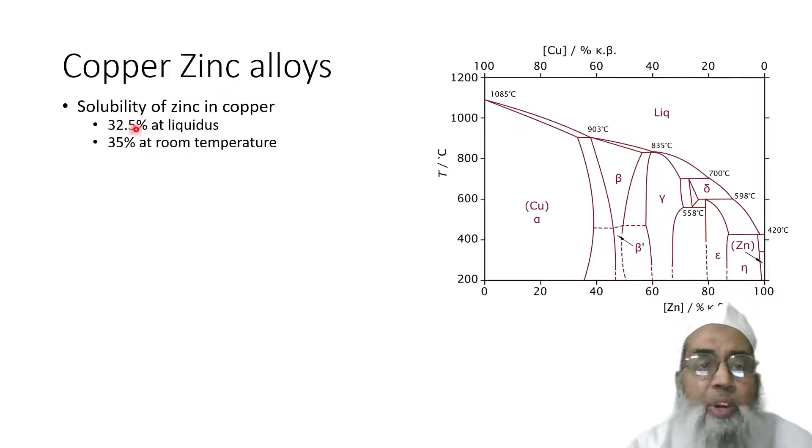Now, copper zinc alloy. If we look into this, this is the phase diagram. Initially, copper is having a small solubility, with 32.5% at liquidus and 35% at room temperature. The major phase is alpha phase, while having a substantial beta dash phase.

Now, alpha phase is relatively soft and ductile, having low strength, while beta phase is hard and brittle. Therefore, with the amount of alpha plus beta phase, the hardness will be given. The hardness and strength therefore increase with the presence of beta phase, but at the cost of ductility, of course. Therefore, we have to optimize for a particular application how much hardness we need and how much ductility will be reduced.

Now, similarly, in copper zinc alloy, the color depends upon the zinc content and changes to whiter yellow. Now there is flaring. When zinc is there, vaporization of zinc takes place. After vaporization, this zinc gives a very blaring white color, which we call flaring. With the increase of zinc content at a particular melting temperature, it increases.

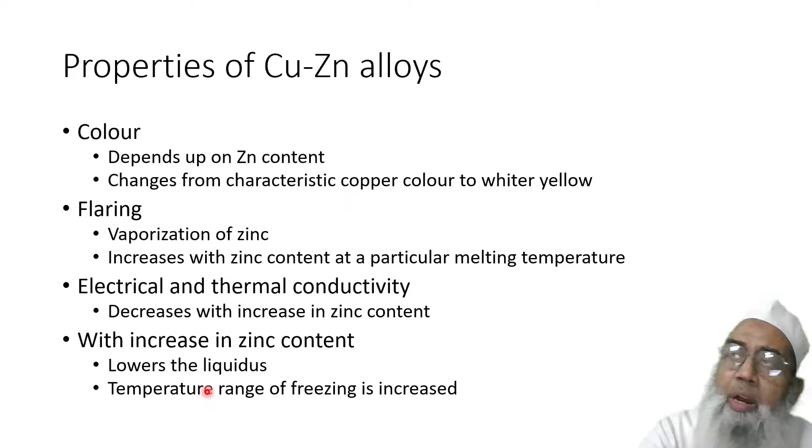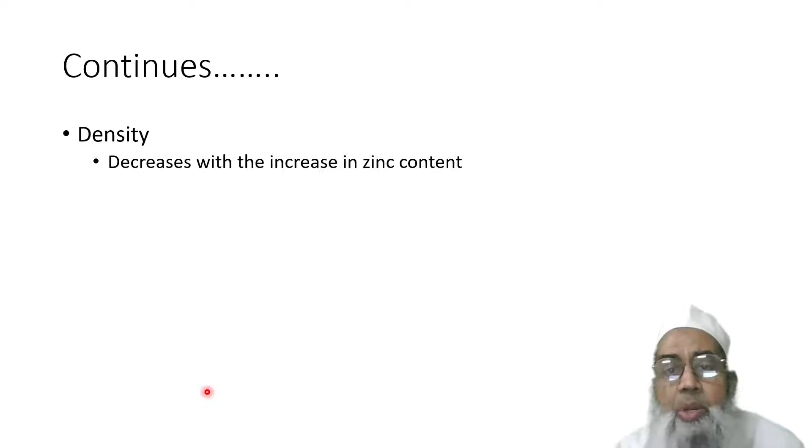Now thermal and electrical conductivity decrease with increase in zinc content. Therefore, depending upon the requirement, we have to take into account how much zinc is required. If we look into the phase diagram, zinc content lowers the liquidus, and the freezing temperature range increases with increase in zinc content, and therefore this will promote dendritic formation of the crystals. Moreover, the density of the alloy will decrease with the increase in zinc content.

This zinc gives dendritic solidification because the temperature range is wider, and therefore this promotes dendritic segregation. Therefore, non-uniform distribution of constituents is there, due to the dendritic freezing mechanism, and it also causes less corrosion resistance, and the properties of the copper get reduced with increase in amount of zinc.

Another important alloy is copper tin alloy, in which the solubility of tin in copper is in the form of alpha phase. It is up to 13.5% during solidification. At lower temperature, alpha plus delta eutectoid occurs. Here also, similar to zinc, there is a long solidification range, and hence coring and segregation of dendrites take place. This segregation causes embrittlement and also restricts the feeding mechanism, and this is all due to the delta phase.

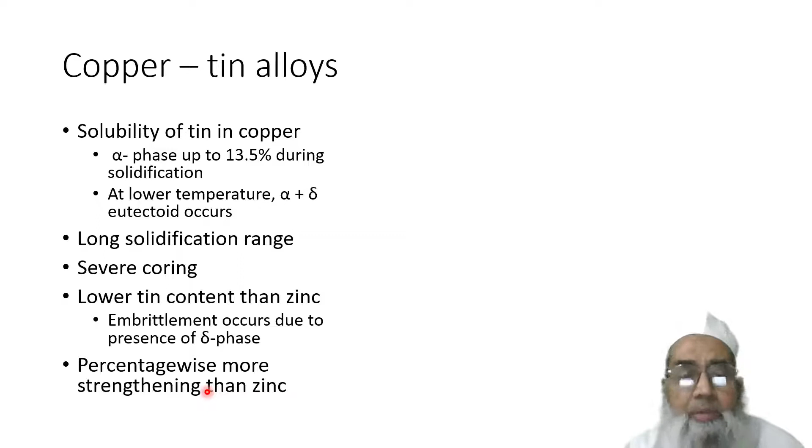Now, tin is more strengthening than zinc. Now, this gives the phase diagram. You see, this alpha phase is there, but this delta phase at room temperature causes embrittlement. Therefore, we have to make a compromise with the delta phase.

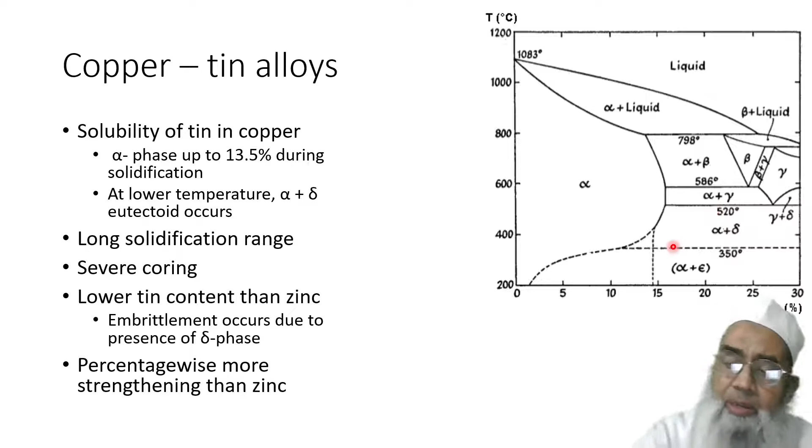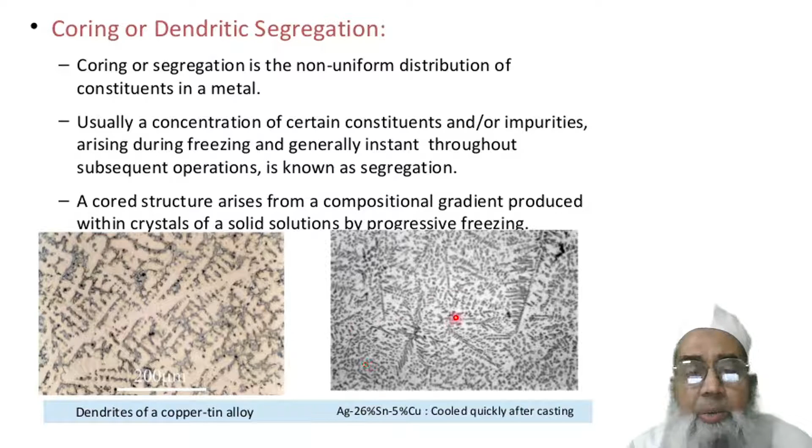Now, this is an example. You can see the corings have taken place with copper tin alloys, having 26% tin with silver. You can see the dendrites have been formed in casting products.

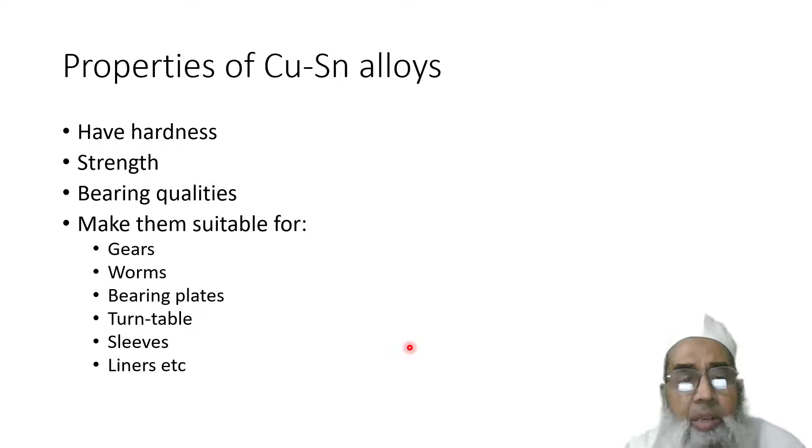Now, if we look into the properties, hardness increases with tin content, and strength as well as bearing quality increase, because the strength increases and therefore bearing capacity also increases. Hence it is used for fabrication of gears, worms, bearing plates, turntables, sleeves, liners, etc. Because of its resistance to corrosion, it is used in marine construction, naval vessels, bridges, dams, hydroelectric plants, and chemical processing industries.

An alloy of 88% copper, 10% tin and 2% zinc is known as G alloy or gunmetal. It possesses better all-round resistance, and therefore has extensive use.

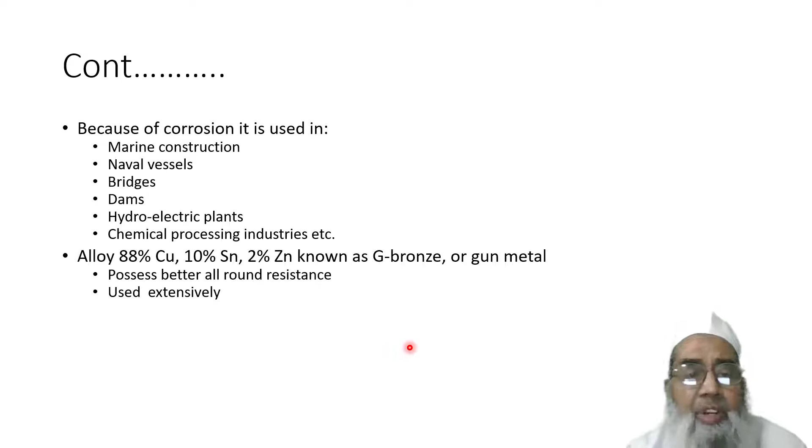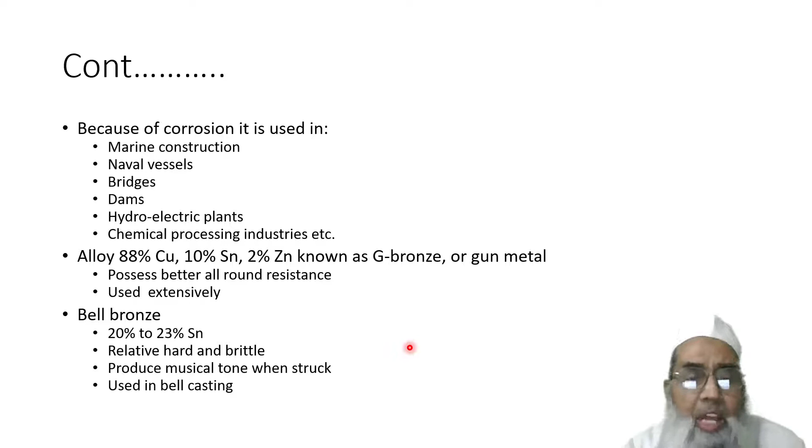Now, bell bronze is another alloy which is also being used, having 20 to 23% tin. It is relatively hard and brittle, but when it is struck, it gives a musical tone, and therefore it is used for casting bells.

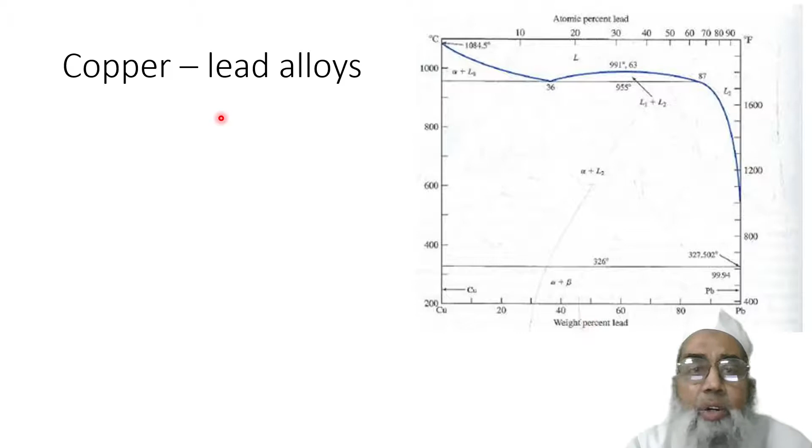Now, this gives a figure of the phase diagram of copper and lead alloy. Now, you see here the solubility of lead in copper is very little. It is about 0.002 to 0.005% at room temperature. But the bad thing is how it is present.

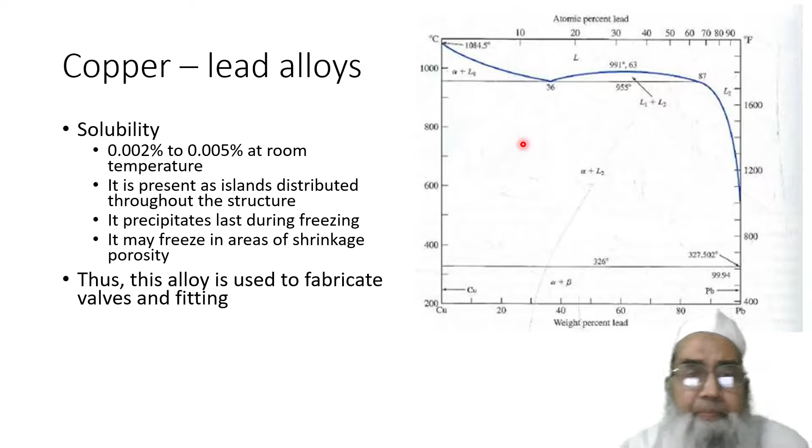It is not very much miscible. Rather, it is present as islands distributed throughout the structure. While freezing, they precipitate out as islands in the locations where the shrinkage porosity takes place. However, it restricts. But if the amount of lead is more, then this of course enhances machinability, but obstructs the appearance of it. Thus, the alloy is used to fabricate valves and fittings. Now, weak lead islands make machining soft, but it produces a discontinuous chip.

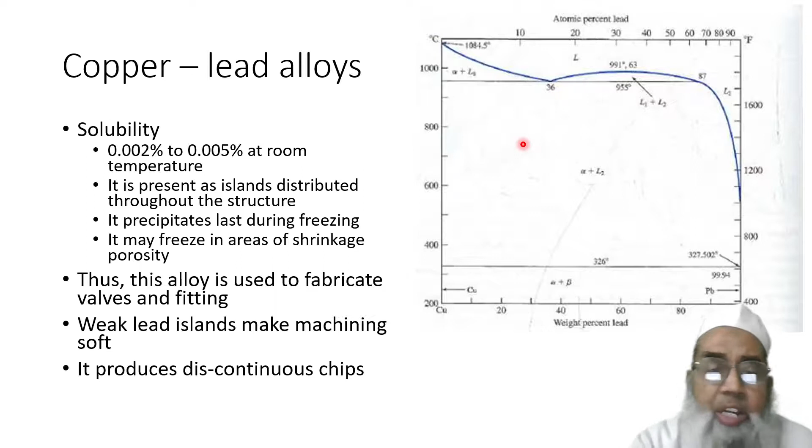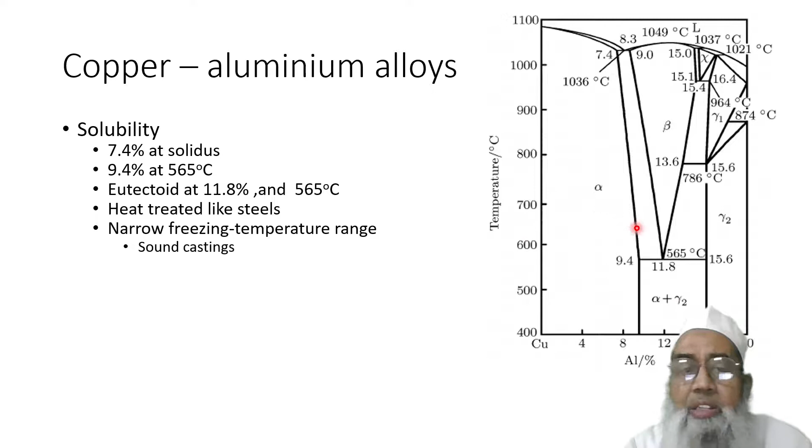Now, another is copper aluminium alloy. This is a very important alloy. Now, you can see the phase diagram over here. Initially the solubility is about 7.4% at solidus, while 9.4% at 565 degrees centigrade. But one thing is very important: if you look into this phase diagram, we can see that this is alpha phase, which is soft. But this is eutectoid.

11.8% aluminium gives a eutectoid, and therefore after that, if we cool down, it separates into two different phases. This gamma phase is hard. Alpha phase is soft, and therefore if we can capture this gamma phase by heat treatment, then of course hardening can be done, and therefore quenching for heat treatment.

Now if we can control the freezing temperature range, then we can have a sound casting. It is very narrow, and therefore can be controlled by different mechanisms. And also the eutectoid at 11.8% at 565 degrees centigrade gives the heat treatment facility. This heat treatment can be done by holding the component at 790 degrees centigrade to 870 degrees centigrade, and then cooling it. Then we reheat it so that we can optimize strength, hardness, and ductility.

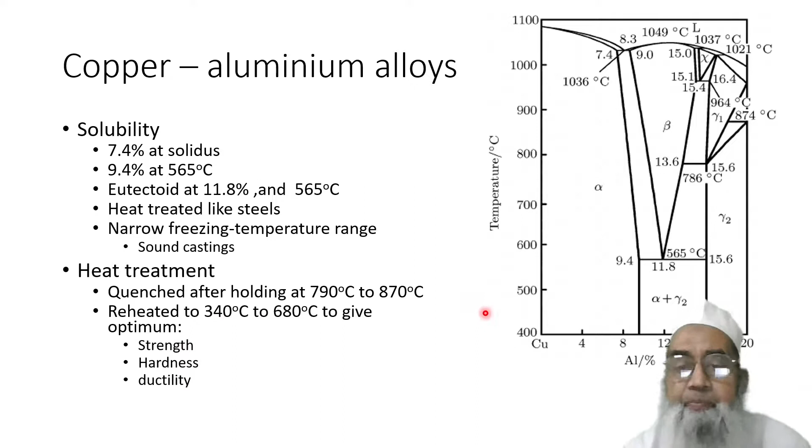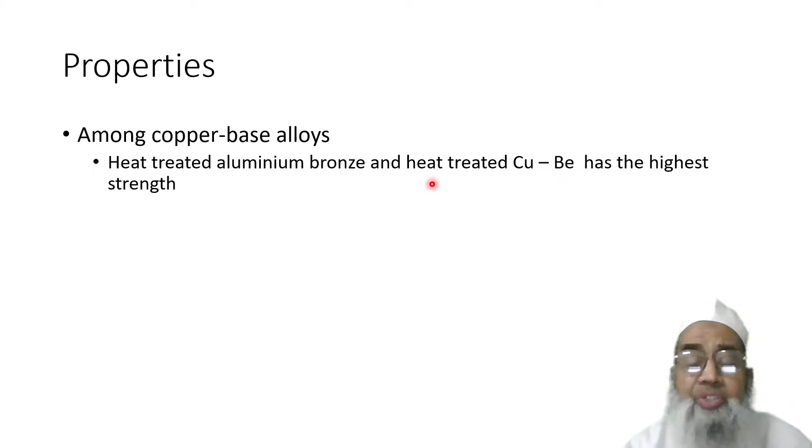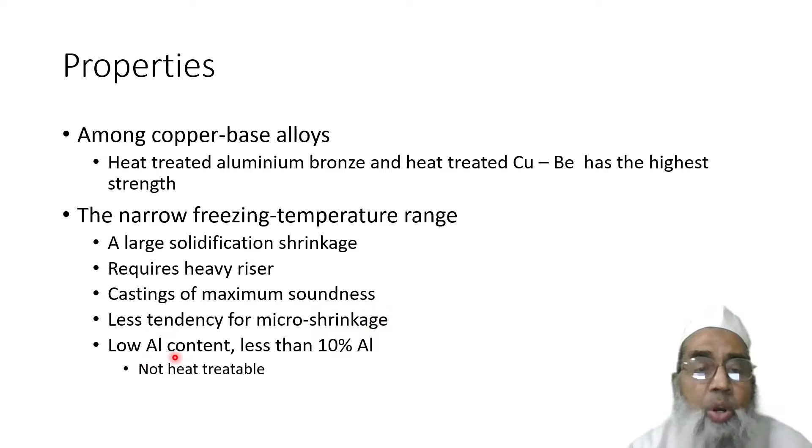Now therefore, among copper-based alloys, heat treated aluminium bronze and heat treated copper beryllium have the highest strength, and accordingly they have a lot of applications. The freezing temperature range we have seen in the first diagram is very narrow, and therefore large solidification shrinkage requires heavy risers for casting of maximum soundness. That short range gives less tendency to micro shrinkage. Low aluminium content, less than 10% aluminium, cannot be heat treated.

Now there are different types of copper aluminium alloys. Low aluminium content, that is less than 10%, can't be heat treated. However, higher aluminium content, more than 10%, can be heat treated to high strength.

Now, the effect of iron. Iron is always being picked up, because sometimes we use steel pots, and while using these steel pots, the copper picks it up, and it is necessary to achieve grain size. This iron facilitates control of the grain size. In its absence, coarse grain is obtained. If more than 0.75% iron is there, then freezing begins with delta phase iron. This serves as nucleation throughout the casting, and therefore prevents grain growth, so we can control the grain size. Excess iron content causes iron hard spots to form in the casting, and therefore machining becomes difficult.

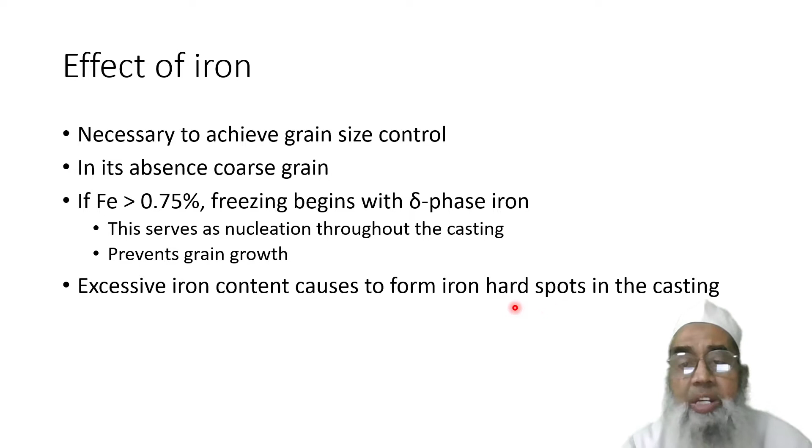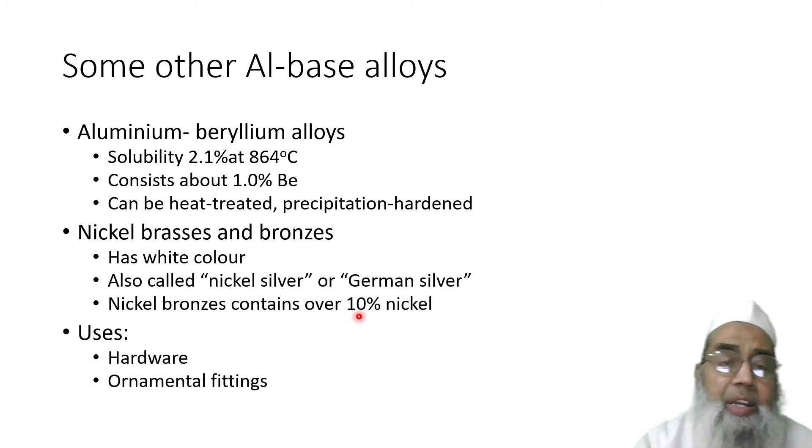Some other copper-based alloys like copper beryllium, which is soluble 2.1% at 864 degrees centigrade, consist of about 1% beryllium. It can be heat treated, and precipitation hardening can be done. It is the copper alloy having the maximum strengthening and hardening. Nickel brasses and bronzes have a white color, and are therefore also called nickel silver or German silver. Nickel bronze contains over 10% nickel, and it is used in hardware and ornamental fittings.

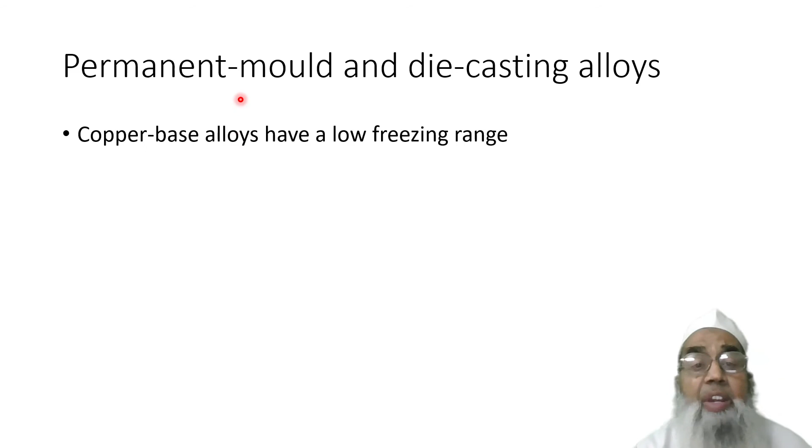Now permanent mold casting and die casting can also be employed with these copper-based alloys, because the freezing range is low, and due to this freezing range, we will have a chilling effect, and grain control can be done. This is all about copper alloys.